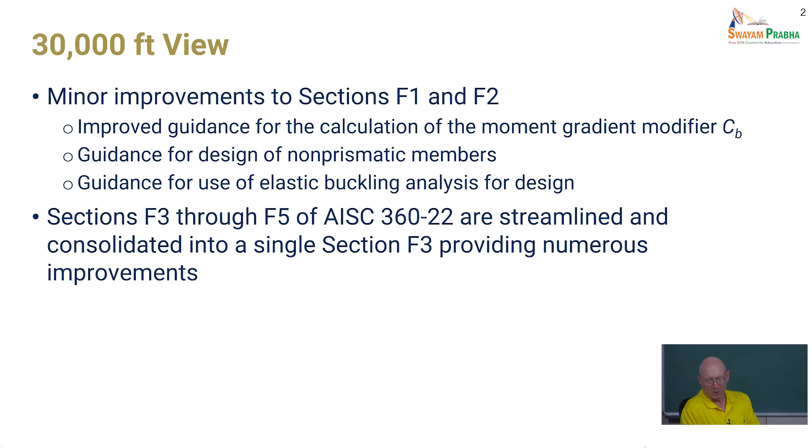So I'd like to show you how the new provisions are working, and I'll relate what I show you here back to what's in the current standard. The way the new section F3 sets up is when we're looking at calculating flexural resistance, we consider three limit states.

Number one, yielding and web local buckling. So we're going to look at that first. That essentially sets a plateau resistance for the section. This is similar in Eurocode, where if you have a Class 1 or a Class 2, you have a plateau, and the resistance is the plastic moment.

If you have a Class 3 section, then the resistance is reduced. I think we have a little more detailed approach there, essentially a linear transition between plastic moment and yield moment in that range. And if we have a slender web, that would essentially be a member with a Class 4 web, and we have a reduction factor that approximates what we'd get in Eurocode or in the Indian standard by applying an effective width reduction to the web.

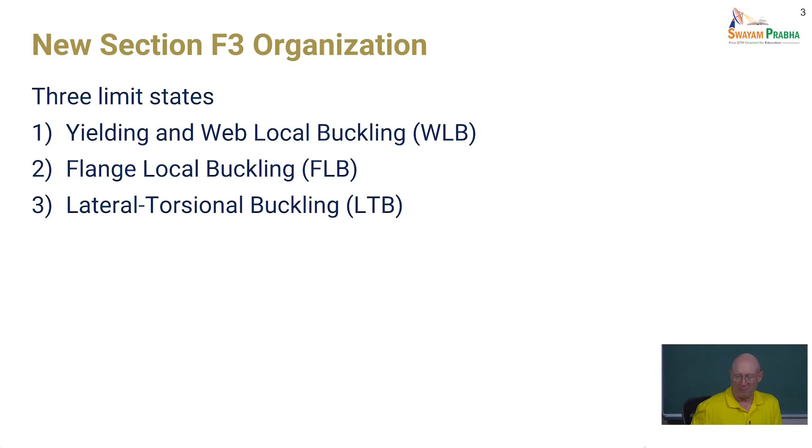Once we have that, then we'll look at how we use that with checking flange local buckling and lateral torsional buckling. So the first bullet here is pretty much what I just said. The plateau is defined here by the yielding and web local buckling limit. In large part, the provisions are equivalent to the AISC 360-22, the current specification in sections F4 and F5, but everything's consolidated and there's some improvements here in the calculations.

If you dig into the sections F4 and F5 at present, you see some reduction factors called RPC and RPT. Those have disappeared, but the expressions are still the same, they're just written more directly without those factors. And there still is what's called a bend buckling strength reduction factor if you have a slender web. That was called RPG in the current specifications, and we've modified that to RB for bend buckling in this specification.

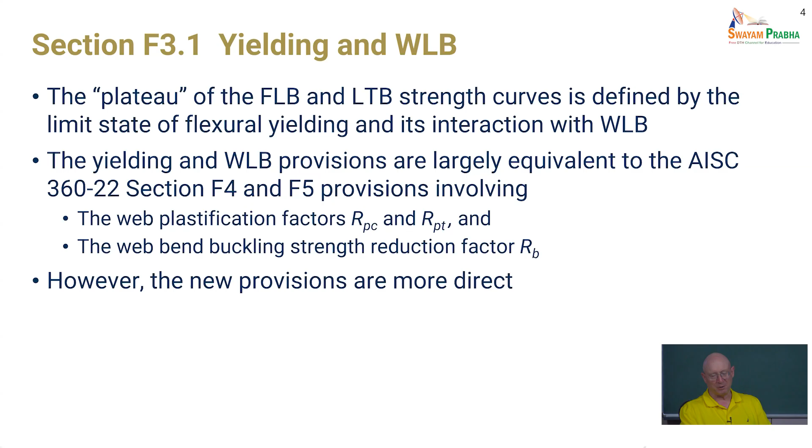So the way the calculation of that plateau strength works, if you've got a compact web in AISC, and I'm going to refer to Eurocode a lot, knowing that the Indian standard is largely very close to Eurocode, so I'll mostly just make comments back to Eurocode here. If we have a compact web, that's basically Class 2 in Eurocode, so we're looking to be able to develop the plastic moment resistance. There are other limits that would be equivalent to Class 1, but the main specification provisions are just focused on calculating strength.

So the plateau strength is referred to as M subscript W, and it's equal to MP if you have a compact web. If the web is non-compact, then there's simply a linear transition between MP and MY, between essentially a Class 2 limit for the web and essentially a Class 3 limit for the web.

So Class 4 is what in AISC we would call a slender web. And then when it's a slender web, the strength is less than the yield moment, but rather than work directly with an effective width calculation in the web, we have a rather ancient equation that was developed way back in the day by Professor Basler in the early 1960s. That equation is the RB equation, was denoted RPG in the previous, current AISC 22 standard.

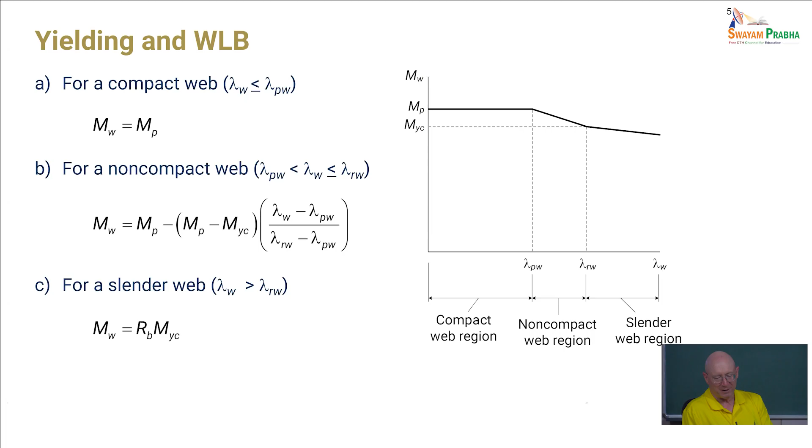So a fairly significant change here is with singly symmetric sections that have a larger flange in compression. If you have a large flange in compression, your neutral axis of the section moves closer to the large flange, right?

If the section is doubly symmetric, or if it's singly symmetric with the smaller flange in compression, then we calculate a yield moment, or a yield moment to the compression flange, and that's simply the yield stress times the elastic section modulus. The term HCY here is basically the web depth in compression at yield, equal to the elastic depth of web in compression. So with these sorts of sections, if singly symmetric, the tension flange has a smaller stress when we're reaching the yield moment, and the compression flange has a calculated stress of just reaching FY.

If it's a section with a larger flange in compression, then we've implemented a mechanistic calculation of yield moment when the compression flange first nominally yields. For this type of section, we get first yielding at the tension flange, then a spread of yielding up the web as we continue to increase the moment. Once we reach nominal yielding of the compression flange, you get a stress distribution like you see here to the right. HCY in this case, or HCY over 2, is the depth from the bottom of that compression flange to the neutral axis for this particular stress distribution.

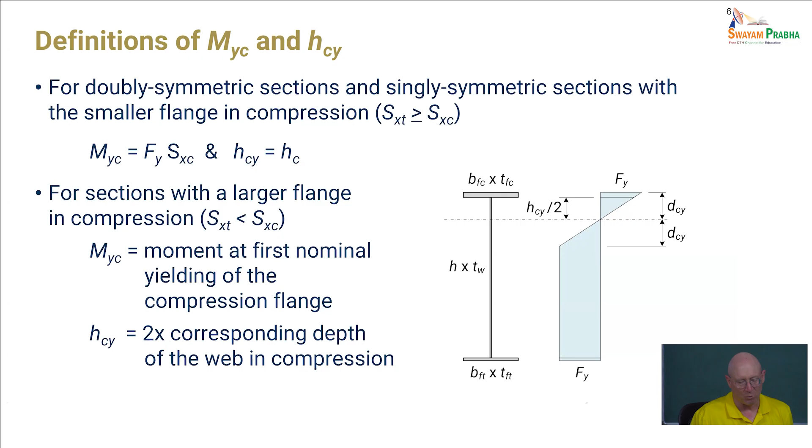And just like if you had a composite section, so you have a composite slab in positive bending, you've got effectively a large compression flange at the top, right? When we design composite girders, we allow extensive yielding through the web in calculating their strength. Usually we'll count on the plastic moment, and this is essentially paralleling that. Your MYC here is a moment at first yield that we use as a base for continuing the calculations, but it's very close to plastic moment in many sections that behave this way.

Now, along with that, there is an equation that is currently case 16 in the AISC table B4.1B. That is a more general equation for a compact web limit. The equation, if you compare it to the equations in Eurocode for class 2 web, is a fairly reasonable approximation of what you get with the Eurocode equations, but it's a little more succinct. The compact web limit is a function of the ratio of plastic moment to yield moment here. For doubly symmetric sections, that ratio of HCY to HP becomes 1, and the equation simplifies.

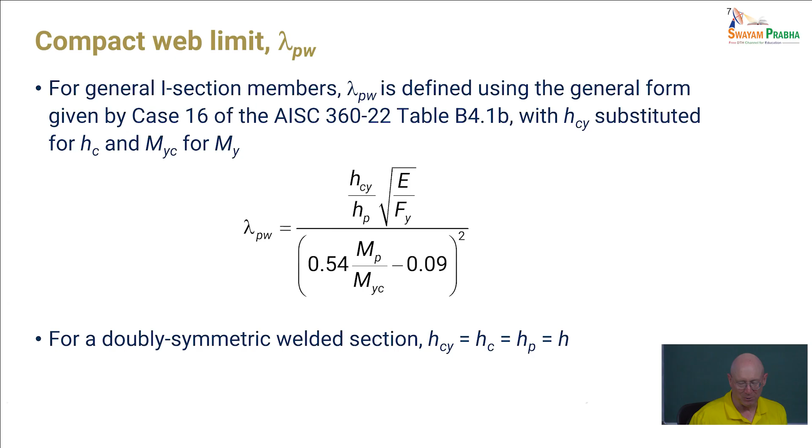But if you have sections with a relatively large MP to MY, you tend to get a lower limit for your plastic or compact web limit using this equation. And the non-compact limit, Dr. Lakshmi Priya basically discovered this in her research, that there was sensitivity in terms of what we should use for that limit to the ratio of the compression area in the web to the area of the compression flange. Now, the non-compact limit of the web is basically what we need for the web to be able to get to the yield moment of the cross section.

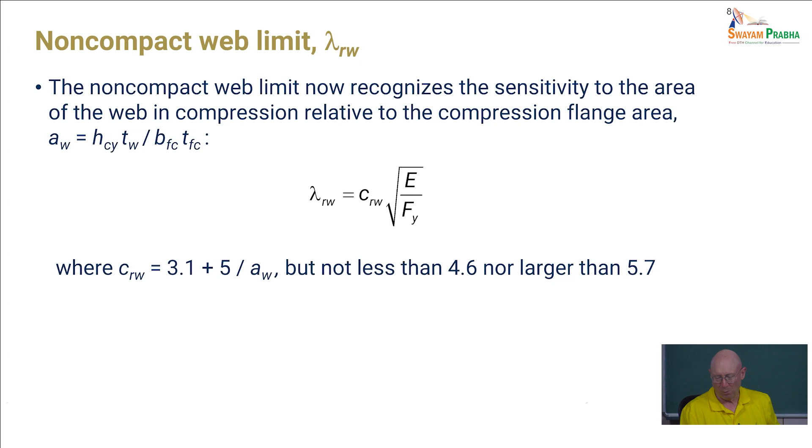So, based on Dr. Priya's work, if you have a section with a relatively large web compared to the flanges, often a very deep section with narrow flanges, you're going to tend to have a CRW that's 4.6, which is more conservative than what we have used in the past, which is the upper limit of 5.7.

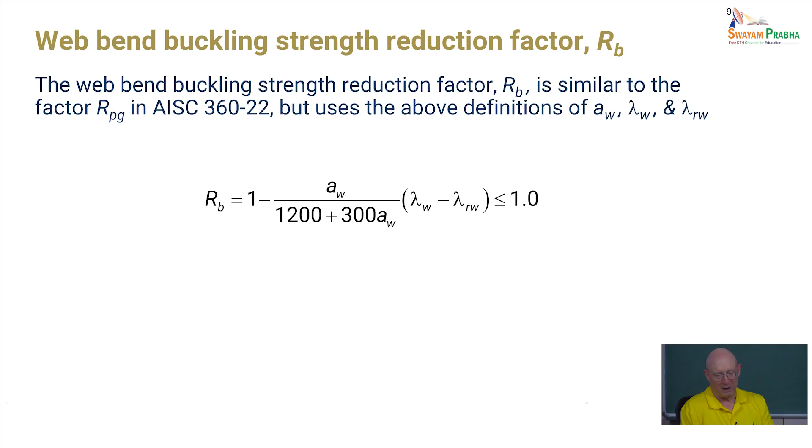This equation is an approximation of the influence of using an effective width if we were to take that approach in the web. The equation is the same as the Rpg equation we've been using, however we're using it with terms. The A sub W, the lambda W, and the lambda RW are keyed to the HCY, the depth of web in compression for the general case, whatever you have at the first yield of the compression flange. That's the plateau strength.

Given the plateau strength, in the next few plots we're plotting either flange local buckling strength or lateral torsional buckling strength on the ordinate, versus a slenderness term on the abscissa. Here the slenderness of the flange, BF over 2TF, is lambda F.

The flange local buckling rules have been liberalized a bit. You can gain some significant advantages in this case if you have non-compact or slender flanges in compression. So the new calculation will basically just use a linear function, which is a coarse representation of what we would get if we did an effective width approach to calculate the contribution of the compression flange. So it's accounting for some post-buckling strength, and tends to be accurate in some cases, but often still conservative.

But it gives you a larger strength than what we've been using, where the dashed curve here is what the AISC specifications previously have just been using, a pseudo inelastic buckling or elastic buckling calculation for the compression flange.

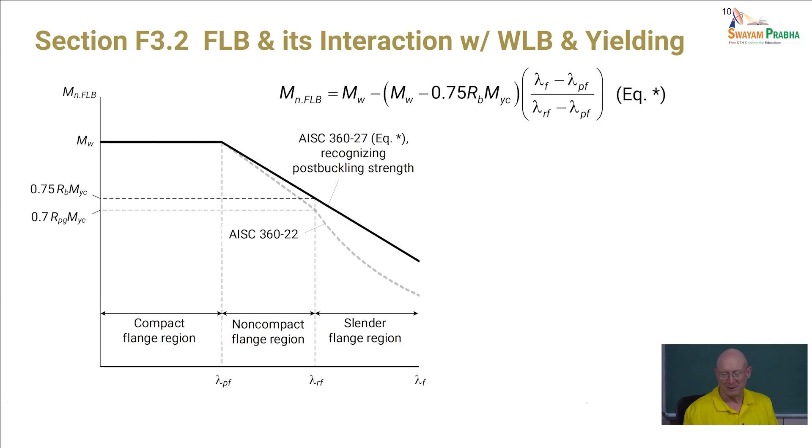For the lateral torsional buckling, there are some fairly significant changes. We're moving in the direction of using a non-dimensional slenderness that would be the square root of Fy over F critical. If the non-dimensional slenderness is less than the limit lambda p LT, we'll look at how we can write that here in a minute, where we reach the plateau strength.

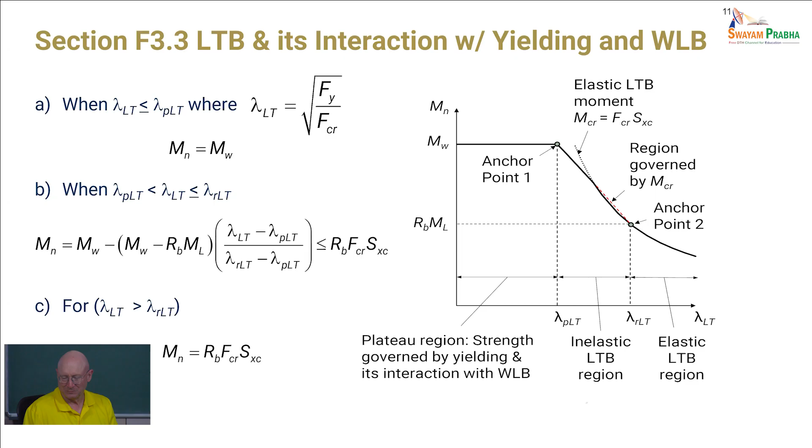Otherwise, there's a linear transition, and then when we reach the limit lambda r LT, basically we're into an elastic buckling calculation. So we still work directly with an elastic buckling LTB resistance in that last region. I'll come back to this curve and show a little more about it in a minute.

That inelastic to elastic lateral torsional buckling transition is tied to the slenderness lambda RLT, and it's tied to the moment ML. ML is simply the elastic lateral torsional buckling moment at that particular LTB slenderness.

In the general provisions, we're using 50% of the yield moment as the moment at that transition. If it's a rolled I-section member, we're using 70% of yield moment, consistent with the earlier sections of Chapter F. Those sections, the first and second section F2, are addressing only compact rolled sections. So for general sections, if you have a rolled section, using ML equals 0.7 MYC gives you comparable results to what you would get from section F2.

And the LTB slenderness at the elastic to inelastic transition, lambda RLT, is simply the square root of Fy to ML, the elastic buckling moment at that level, so ML over SXC.

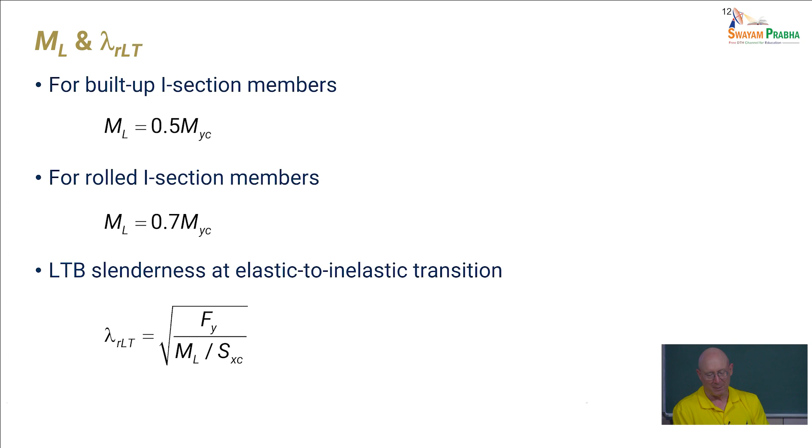Now, it's often questioned in the U.S. - a lot of concerns - we're essentially lowering that limit from what we've traditionally used, 0.7, to 0.5 of the yield moment. So a lot of engineers will ask the question: look, are your residual stresses really that large where you need to reduce to only 50% of the yield moment?

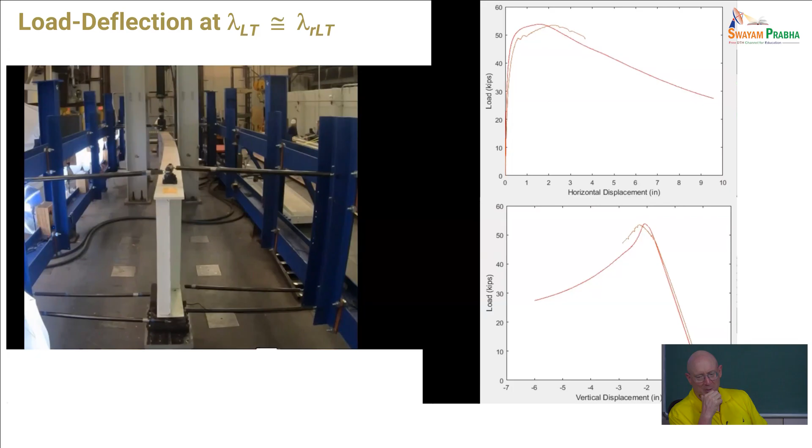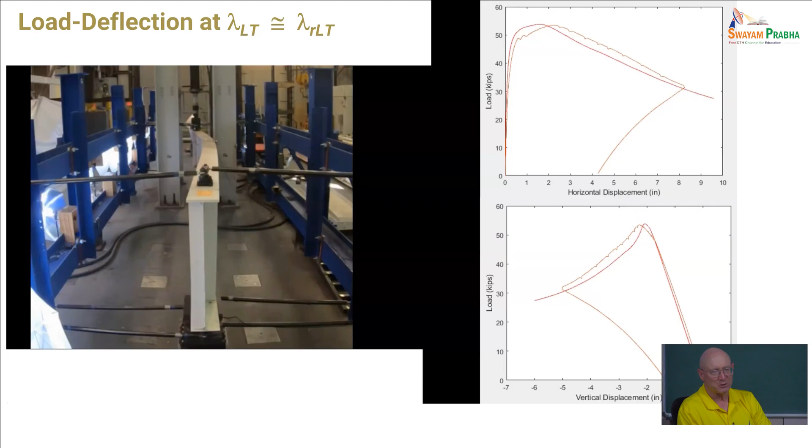The answer is there's a lot more going on than just a moment, a stress due to the major axis bending plus an initial residual stress. We're a little past the peak load here, but at the peak load in this test, you can see there's quite a large amount of lateral bending of that compression flange on top. So there are initial residual stresses, then to that we're adding our major axis bending stresses, but with any out-of-straightness of the compression flange, as you're approaching the elastic buckling moment level for a member with slenderness close to lambda RLT, you're getting substantial lateral bending, and that's tending to cause a reduction. That's a big part of what's causing the reduction in strength.

So what you can see here on the right is basically our prior prediction for this particular test, and then the test result.

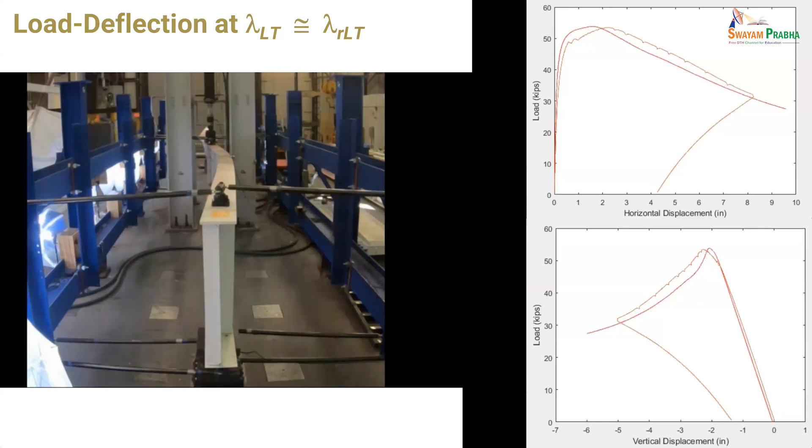Now that was the test I was showing you, a moment gradient test of a slender web. That's the simplest case. In those cases, lambda PLT is a constant 0.35 for all cases.

However, what we were finding was that if you had a web more typical of a rolled section, well within the compact web limit, the provisions in section F2 are actually doing a good job of predicting the experimental results, whereas the approach that worked well for slender web members wasn't working so well. It was tending to be quite conservative.

The way we looked to try to solve that was basically to adopt essentially the way it's being done if we have a very stocky web. I'll try to show this on the next slide to explain it. The lambda PLT prime equation here is basically what we get with the current approach in section F2 of the specification, except we put a cap of 0.8 as an upper limit on it.

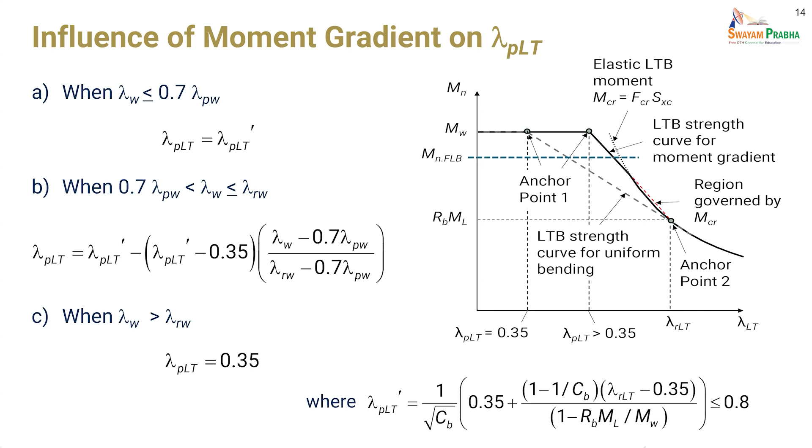So this slide is an attempt to show how the current section F2 works and the way AISC has traditionally applied the moment gradient factor C sub B.

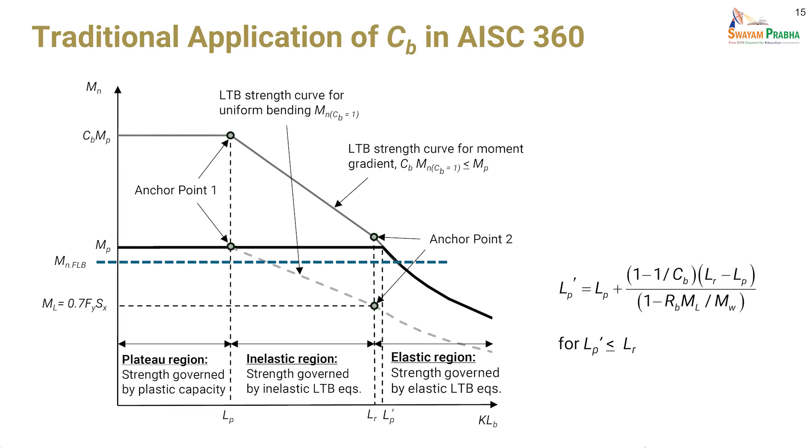C sub B is a constant basically calculated as the ratio of the elastic lateral torsional buckling strength given whatever variation in moment or moment gradient you have within the unbraced length, divided by what would be the elastic lateral torsional buckling strength if we just had uniform bending within the length.

And so AISC, since 1986, has always taken that elastically calculated C sub B, and then we scale the entire uniform bending strength curve by that factor, but then we limit the maximum to the plateau strength.

Here I'm showing it for a compact web section, so the plateau strength would be MP, and if you have a high enough moment gradient, you can actually create a situation where the calculated strength is an elastic lateral torsional buckling strength. That's this part of the curve here, all the way up to MP, because the uniform bending strength curve is plateau, and then the dashed gray curve that you see here.

And so if we scale by C sub B, and if C sub B is large enough, we end up with basically an elastic curve and then plastic moment strength.

I'm showing this as a case of, well, how confident are we that we can actually get that? So we've done some work where we've gone back and explored the available experimental test data in the literature to ask, what is the justification for this?

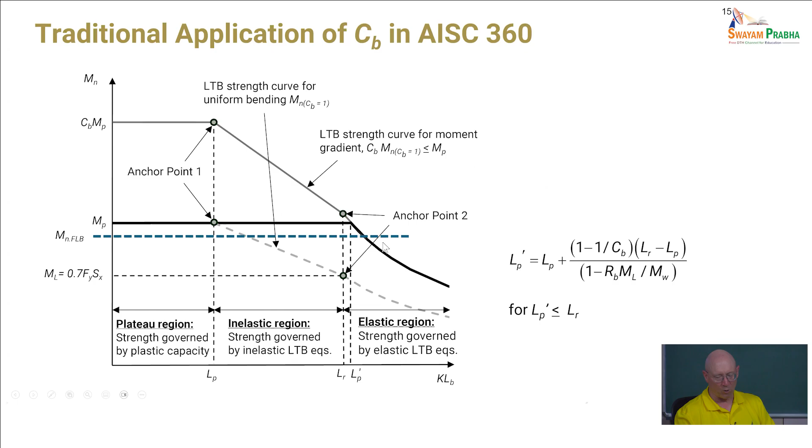One thing that kind of saves us here is for a rolled section, the section properties, the flanges are typically wide enough, even for the beam sections. You'd have to have a super long beam to create this problem, and you're getting into a realm where you'd be challenged that you're not going to have a serviceability problem if you were using such a beam for the lateral torsional buckling strength.

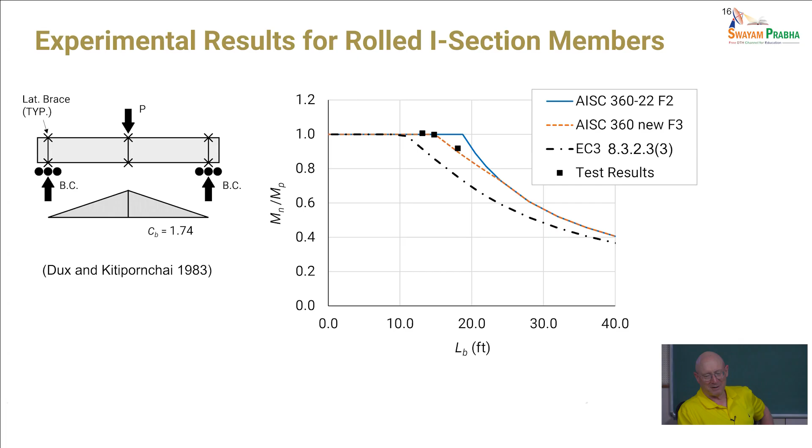These are rolled beam sections, so the web's really not stressed very much in terms of shear stress. Yeah, it's really an issue of the way we scale by CB.

Dr. Helwig and his associates at University of Texas, Austin, have been doing parallel research where they had concerns about the influence of web shear on the elastic LTB resistance and the web shear tending to cause lateral distortion of the cross section. I'm just going to give you a light touch here on these equations and essentially show you the results that we get.

So with their equations, one thing that we've done in the past, if you have a slender web section, is we would base the strength on J equals 0 in the American standard. I think we're the only ones in the world that do it. And part of the rationale for that was that it gives some approximation of lateral distortional buckling effects.

You're basically discounting the help from St. Venant torsion. It also simplifies the equations significantly. If you're doing a hand calculation, it creates a major pain in the neck for Balint if he's going to try to implement that, because when's Consteel going to use J equals 0 and when is it going to use a J for different calculations?

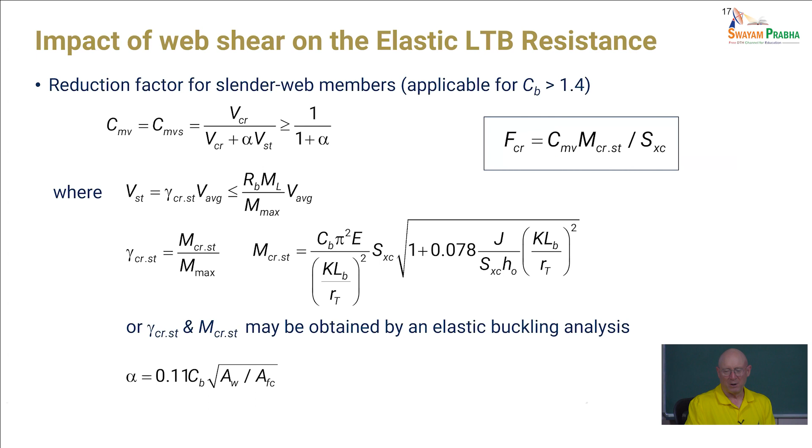So I think it's a good thing that we're moving in this direction, and we'll always calculate the LTB resistance using all the terms from the mechanics for the elastic buckling resistance. But for these cases where there's a clear reduction in the elastic LTB strength due to lateral distortional buckling, we're taking a reduction due to the shear in the web.

So this shows results for essentially a metal building type girder section. It has 6 by 3/8 inch flanges and a 36 by 5/16 inch deep web.

And what you can see here is that the test simulations, I'm just showing you simulation results here. If we're at an unbraced length here, so this is basically forked boundary conditions at the end, or torsionally simply supported, or K equals 1 for lateral torsional buckling if you're calculating an effective length factor for lateral torsional buckling.

And so if we have a length for this specimen, an unbraced length, that is in the neighborhood of about 10 feet, notice what we're getting is that where the current standard would predict you're getting about 85% of the plastic moment here, we're only getting about 60% from the simulation.

So these sort of simulations were things we did early on, working off of the concerns that were voiced by Professor Joe Yura with some of the things with the distortional buckling, with the elastic buckling studies. And what we were finding is actually these sections, the results are even more suspect for the current spec calculations.

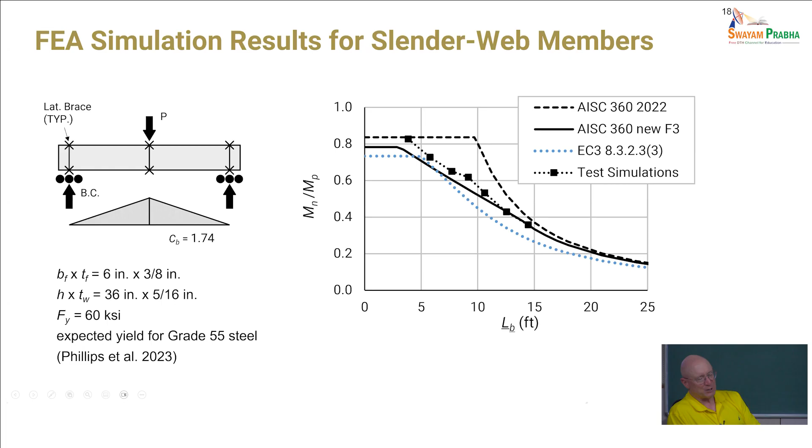So that's what's causing us trouble in terms of getting to the moment resistance. It's basically that lateral distortional buckling, and it's exacerbated by the onset of yielding that's happening in the section.

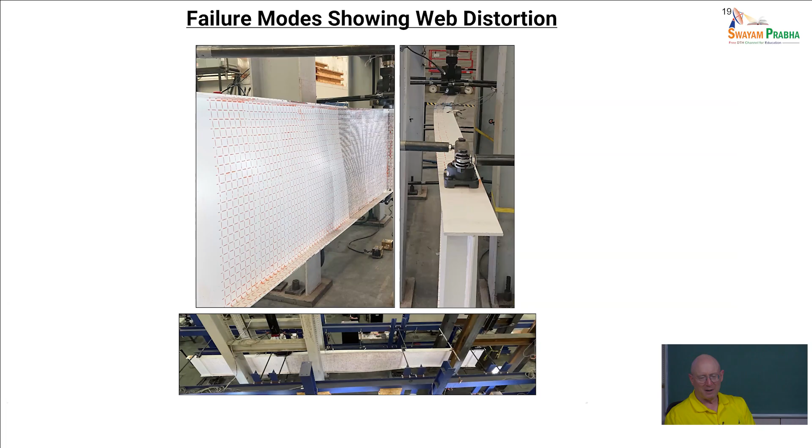So why is that? You'd say, shouldn't I get the most yielding where I have the largest major axis bending moment? Well, no. What's happening is significant lateral bending of the flanges, which I showed you in the experiment video a bit back. So that lateral bending is causing early yielding of the compression flange out within the unbraced length, and that behavior is exacerbated by the web distortion we're getting.

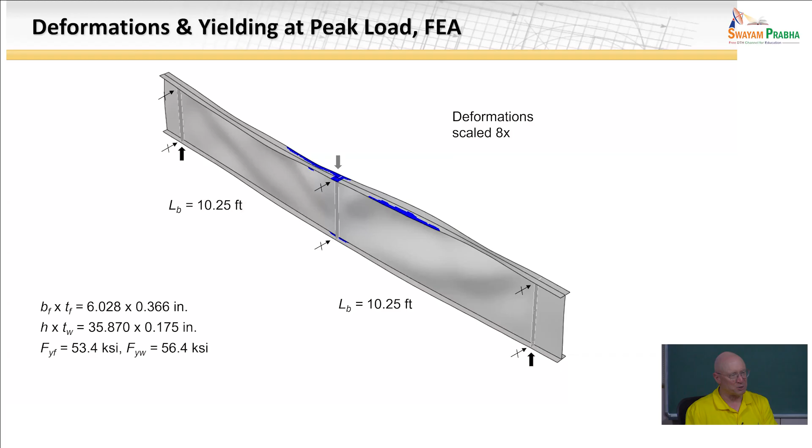And that's pushed by the high shear stress in the web. So given some FEA simulations to try to get our handle on the problem, we designed a suite of 6 experimental tests to try to get confirmation of the behavior. We did tests with 3 three-point bending tests, and 3 tests where the test configuration put the critical unbraced length in full reverse curvature bending.

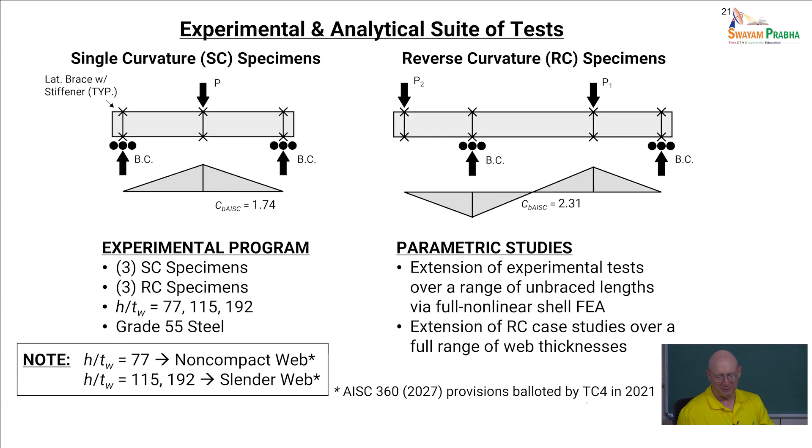For each of those tests, we had specimens with a range of H over TW. These are doubly symmetric sections, so H over TW is the same as HC, HCY, and HP. The stockier web had an H over TW of 77, which would classify it as close to compact, but slightly non-compact using the provisions moving forward. The other 2 webs had an intermediate slenderness of 115, and a fairly high slenderness of 192.

I want to highlight what's going on with the case with the intermediate web slenderness. I'll use that one to highlight what's happening, showing simulation results, then I'll show you the experimental results in a minute.

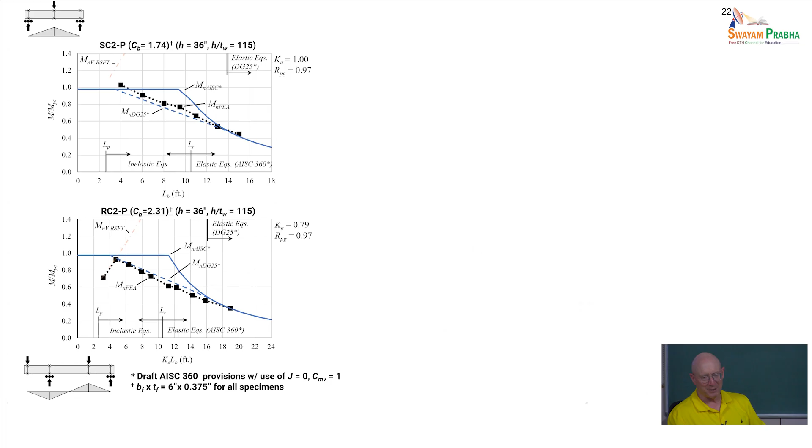If we look at what's going on here, the plots in this case are done using J equals 0, using an RB equal to RPG, less than 1. This is basically the approach that Balint has implemented in Consteel. It's a slender web, so the calculation is basically the same, or nearly the same, as what's in Design Guide 25 for designing frames using non-prismatic members.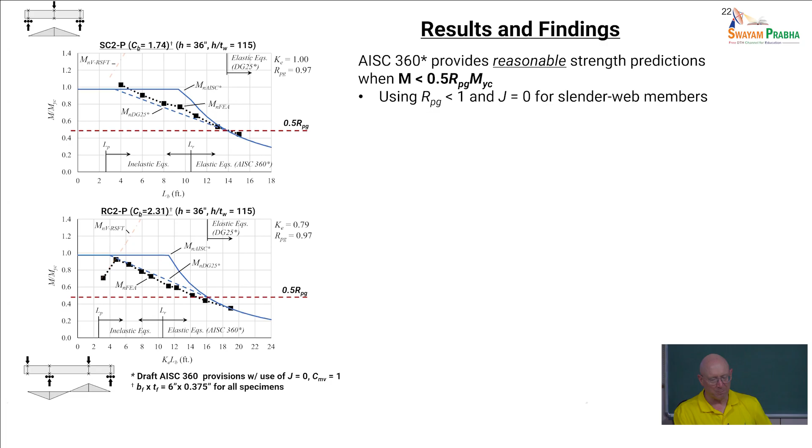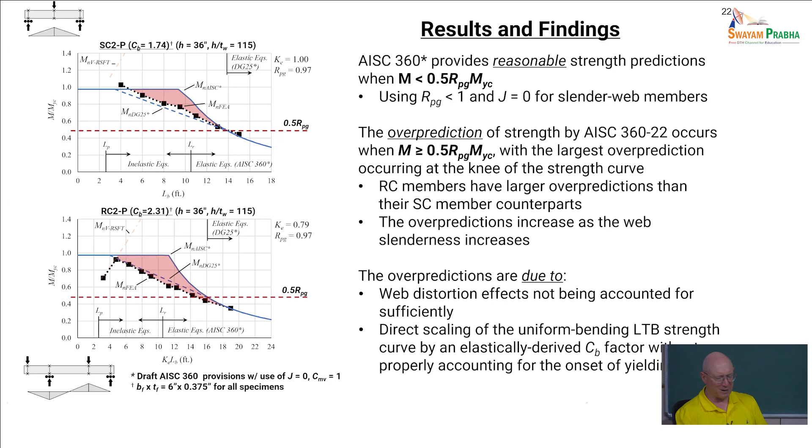What we're seeing from analysis of tests and FEA simulations is this inability to predict the strength here in the current standard. It's coming from web distortion effects, also exacerbated by the way that in the current standards we scale the uniform bending strength by CB without considering whether we're getting any impact of the additional yielding that will occur before we reach the plateau strength.

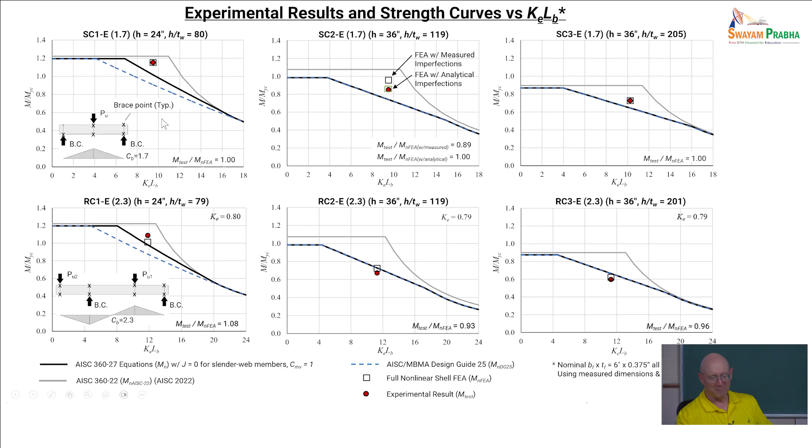So we're basically, for these stockier webs, increasing that plateau length to get a better prediction. You can see here where we are relative to what we obtained from the simulation and from the experiments. This just shows another plot with the full FEA simulations of the various lengths with these specimens and where the simulations fit more broadly.

Our best take on what's going on here is that using Eurocode 3, we're basically required to use curve D of the LTB curve, which is the most damning—it gives you the lowest predictions in strength. Our thinking is that curve D is probably a little more conservative than is justified for these types of cases.

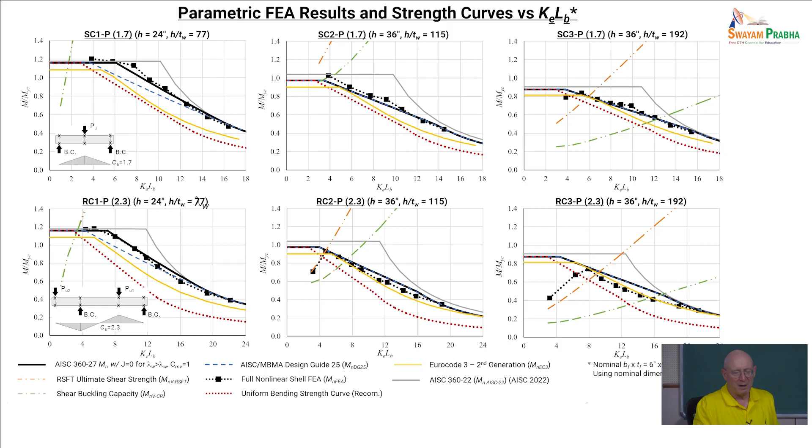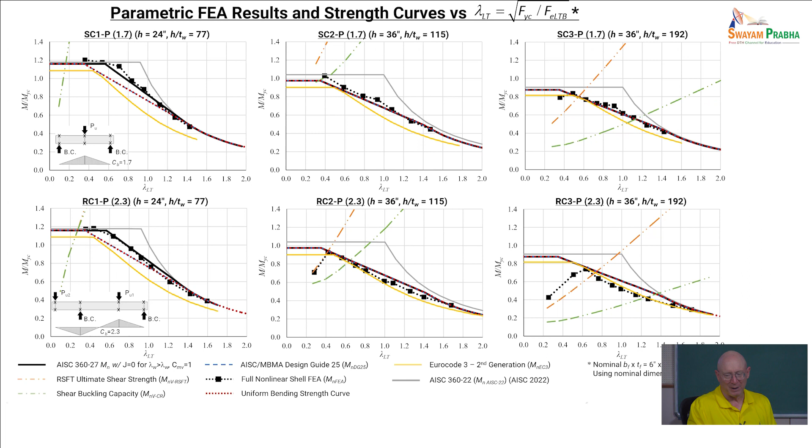If we were to use curve C, we'd be much closer in terms of correlation with what we're getting from our test simulations and our experiments. This shows the same plots, but plotting in terms of the normalized slenderness lambda LT. So those were all doubly symmetric specimens.

However, for these specimens, the neutral axis—either elastically or as we start developing some yielding—is very high and close to the top flange. So the web is in predominant flexural tension, and as a result, based on our calculations, this section actually classifies as a compact web.

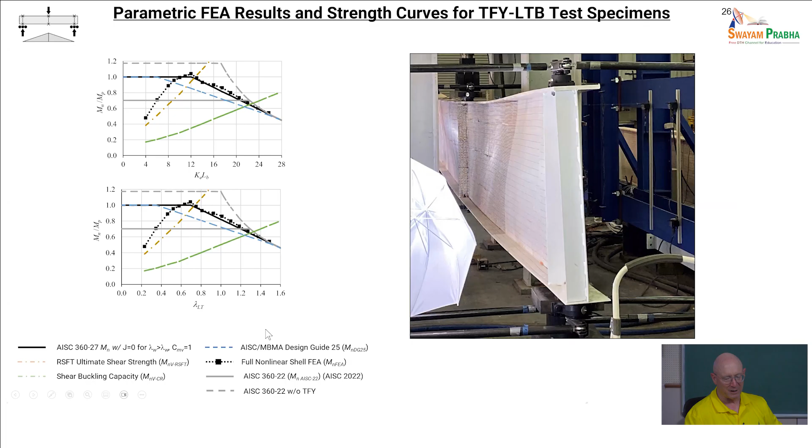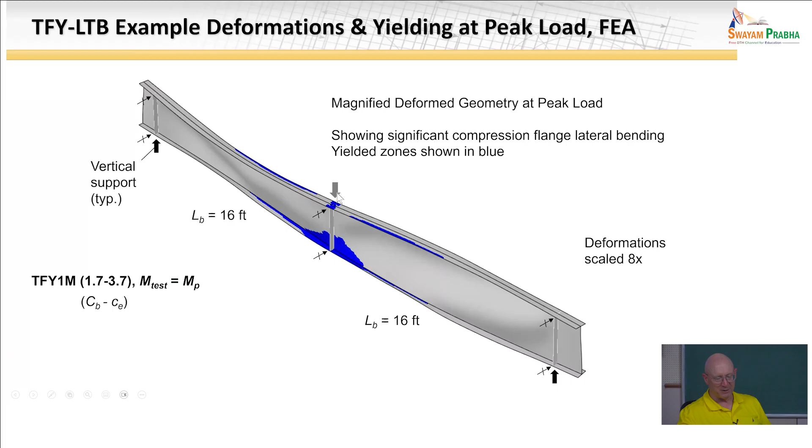Same type of behavior I showed you earlier for a specimen where we're reaching elastic buckling resistance at a point that, in the current AISC specification, would essentially be taken as the plateau strength. We see substantial onset of yielding shown by the blue areas within the unbraced length as we're approaching the ultimate strength. In this case, because of the large compression flange on top, we're getting early yielding in tension in the peak moment region, so all the blue at the bottom of the specimen shows where yielding has progressed at this maximum strength.

All right, so that's an overview of where the American provisions are going. I've put the provisions on the general tab on the Google Drive, along with the current AISC 360-22 specification and commentary, and one other file addressing the compact and non-compact web limits for members in flexure, in Table B4.1b of Chapter B.

We've been looking at this quite intently for a number of years now with the AISC specification committee, because clearly there's a safety issue, or at least an issue where the specification isn't doing very well, if we're getting situations where the predicted strength is close to 1.0 and we're only getting more like 60% of that.

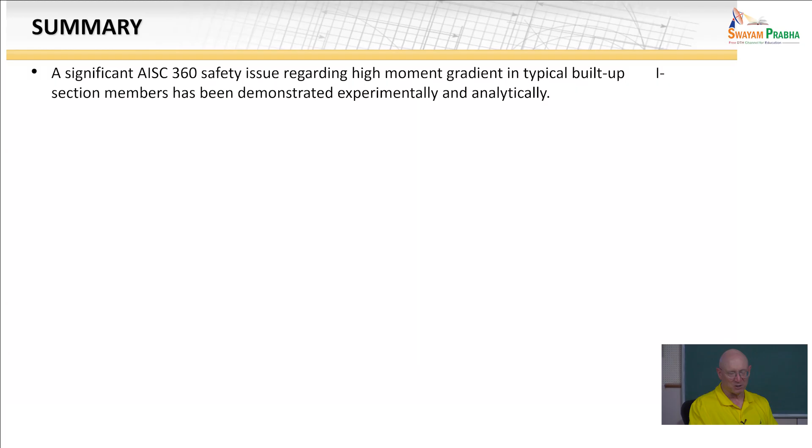We believe that the provisions moving forward solve the problem for slender web I-section members. We use the elastic CB only when calculating elastic lateral torsional buckling stress—we're not scaling an inelastic strength curve by an elastically derived factor. We're expressing the LTB strength curve in terms of the non-dimensional slenderness, lambda LT, equal to the square root of Fy over Fe LTB, or F-critical LTB. That's similar to how we handle column curves—our argument is, we do this for columns, why shouldn't we do it for beams?

We're avoiding applying that C-sub-B in cases where we can see it's not performing well. We've used this approach in Design Guide 25 since its first edition in 2011, so it's not new to North American practice.

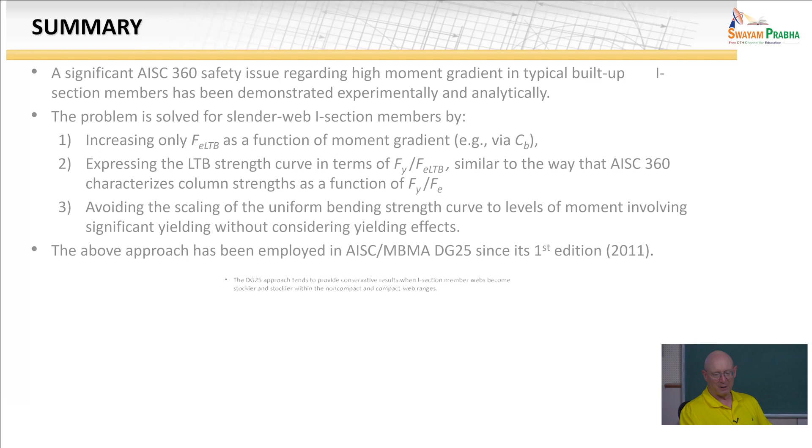But the problem we tried to address in the work I showed you is that Design Guide 25 tends to provide conservative results when we have stockier I-section webs. So we've addressed that by implementing equations that achieve the same calculation as the current AISC approach, in the limit that the web is less than 70% of the compact web limit, with interpolation between those results and the slender web results for intermediate web cases.

And then we have a reduction factor on the elastic LTB resistance to account for shear stress in the web. I think that's a good change, in terms of basing our calculations uniformly on the mechanics, using all the terms—both the St. Venant torsion contribution and the warping rigidity contribution—to the lateral torsional buckling strength. In all cases, we then take a reduction off of that.

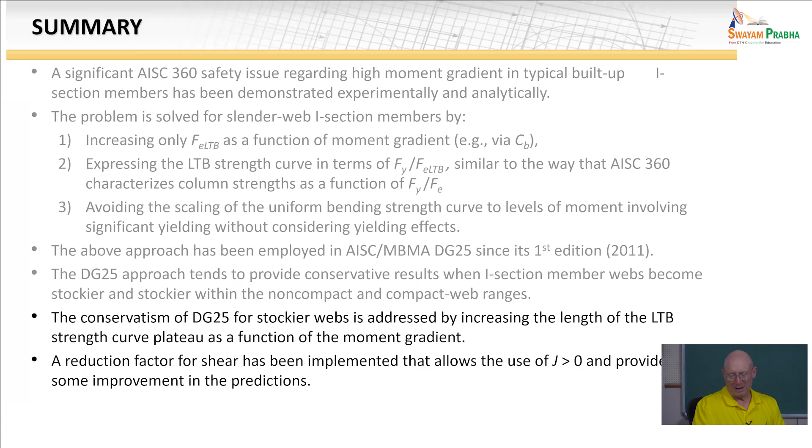I think it's fair to say the Eurocode results are giving adequate predictions—generally tending to be conservative to accurate—and the Eurocode isn't using a shear reduction factor. But the American code tends to base our elastic LTB resistance on a theoretical elastic buckling, so I think we're a bit more on edge there with the way we do the calculation. With good reason then, if we're basing our elastic buckling resistance calculations that way, we should probably be taking this reduction due to lateral distortional buckling.

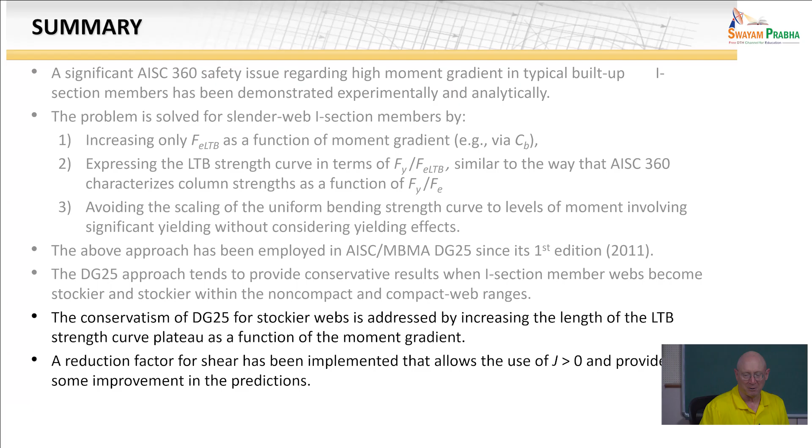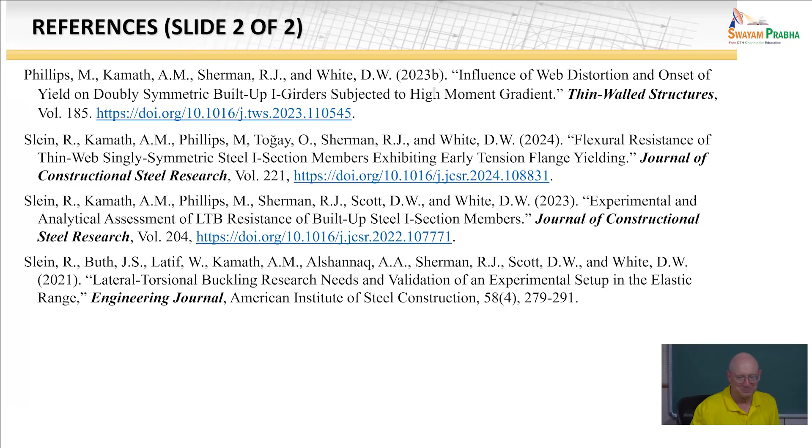There are a number of references here if you're interested in following up, and maybe even taking some of this work further in your studies and your work—you can dig into what we've been studying. All right, so that's the lecture for the day.